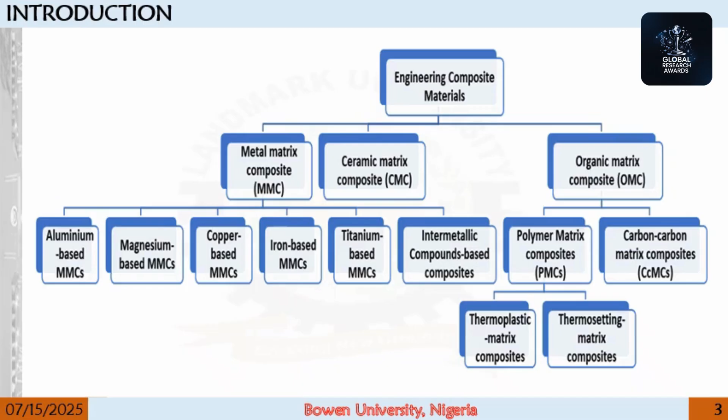However, we are concerned about the metal matrix composite, and it is the focus of this study. It consists of a metal matrix as the base material, into which the reinforcement material is introduced. Now, there has been an increased demand for MMC in automobile, marine, and aerospace industries due to their enhanced properties. And in these, aluminum alloys are the predominant non-ferrous metal used for these various applications due to their good strength to weight ratio, corrosion resistance, and heat and electricity conductivity.

Now, several methods have been used in fabricating AMMC or MMC and are available as presented. So these are the various ways. You have the solid state, the liquid state, and the other techniques. And under the liquid state, which is our interest, we're looking at stir casting. The stir casting method is our focus in this study. Stir casting process was used to develop reinforced matrix composite in this study.

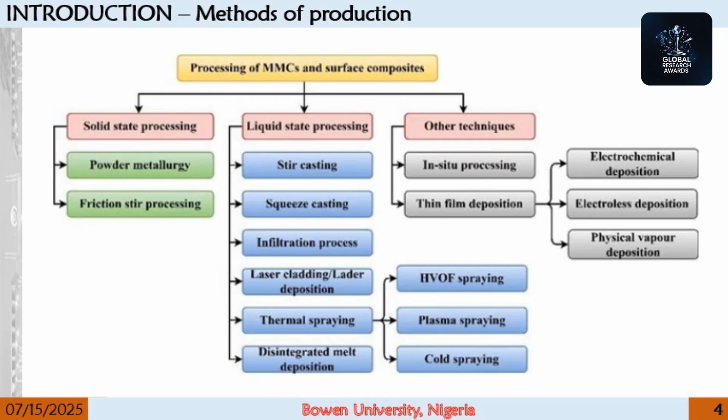Stir casting procedure is one of the most commonly used techniques in the fabrication of MMC, and most especially for aluminum matrix composite. The stir casting technique allows for uniform distribution and dispersion of the reinforcement particle with the matrix material, thereby granting the resulting composite good wettability and reactivity.

Several reinforcements have been used by different researchers. For instance, graphene, titanium carbide, alumina, silicon oxide, boron carbide, silicon carbide, and so on have been used, as displayed in this figure. Those are called the synthetic ceramic reinforcements.

Now, due to the high cost of these synthetic ceramic reinforcements, alternative reinforcement materials have been researched by several researchers, and hence attention has been turned to the utilization of agro waste or biomass and industrial waste and their derivatives, which are considered environmental waste. Some of these wastes include rice husk ash, bean pod ash, palm kernel shell ash, bamboo leaf ash, fly ash, which is an industrial waste, red mud, and so on.

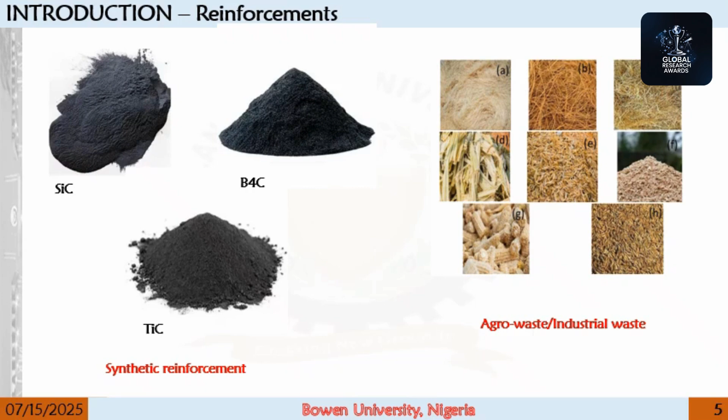These derivatives are hybridized with synthetic ceramic reinforcements to produce MMCs. So they can be hybridized, or they can be used monotypically for the production of MMC, which is metal matrix composite. As seen in the other figures there, we have the corn cob and other materials being shown there.

Now, several researchers have developed different aluminum hybrid matrix composites which are being used across the globe, though new research work is still ongoing to discover more suitable compositions of reinforcement materials. However, little or no work has been done on the effect of sawdust ash, especially the teak wood, as a monolithic reinforcing particulate in aluminum matrix alloy for AMC synthesis. And that's why this topic is looking at these aspects for our research work.

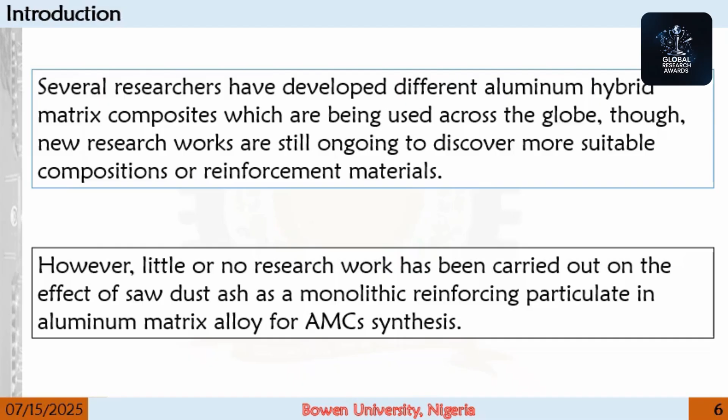Now, the aim of this study is to evaluate the effect of using Tectona grandis sawdust, which is the teak wood sawdust, as reinforcement on the physical and mechanical properties of aluminum 6063 matrix composite. And some of the specific objectives of this work are to evaluate the physical properties of the developed composite, to assess the mechanical properties of the developed composite, and analyze the strengthening mechanism of the composite through examination of the fracture surface of the composite produced.

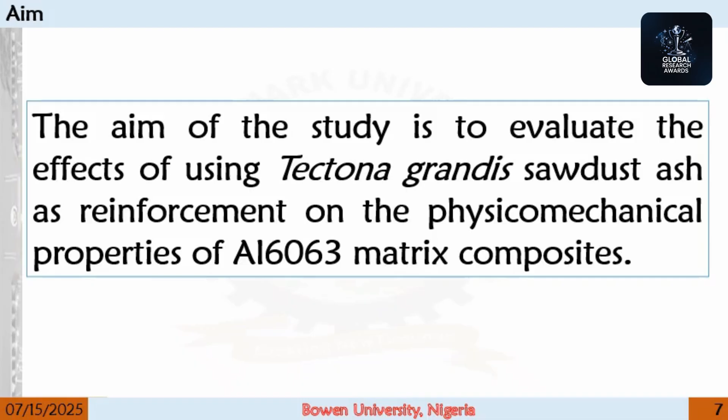Now, these are the materials used for this study. We have the sawdust ash from teak wood, the aluminum matrix, and their chemical compositions are displayed. For interest, in table 2, silica, which is SiO2, is the required one. It has the highest percentage, which is required. Other elements, oxides, are also strengtheners that help to improve the property of the matrix.

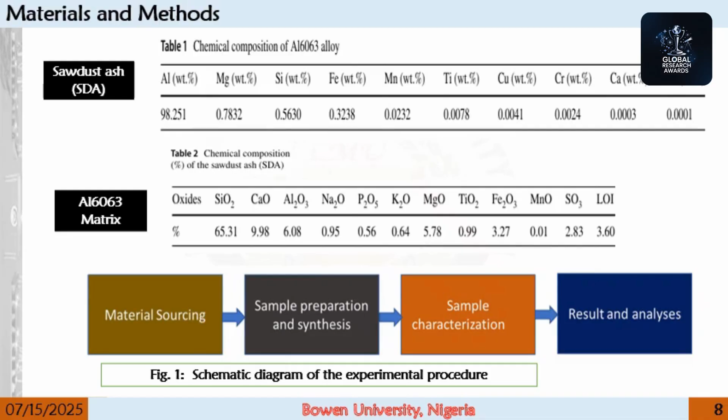So figure 1 shows the method by which these materials are produced, up to carrying out the results: from material sourcing to sample preparation to sample characterization and result analysis. Now, table 3 displays the design, how it was designed. A0 designation means that it's the control sample, where the alloy matrix is not reinforced, it's an unreinforced alloy, while the other ones are reinforced with 2%, 4% and 6% of the sawdust ash.

After production using the stir casting method, figure 2 ensued, where we have the solid metal composite from the sand casting, and it was later machined to produce the tensile sample as shown in figure 2b. The experimentation carried out on this was to determine the density and porosity percentage, and density was determined using Archimedes' principle, and porosity was also taken.

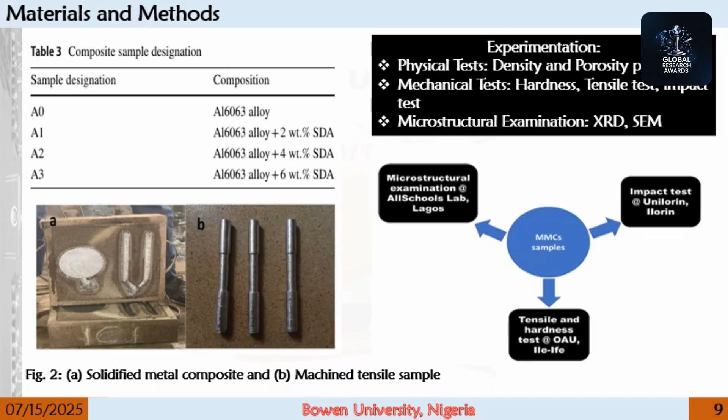So for the porosity percentage to be determined, the theoretical density was obtained and the experimental density was also obtained, and the difference between the two was used to calculate the percentage porosity. We also carried out the hardness test, tensile test and impact test following the appropriate ASTM standard. And lastly, the microstructural examination was carried out for the sample after production and for the fractured surface of the sample.

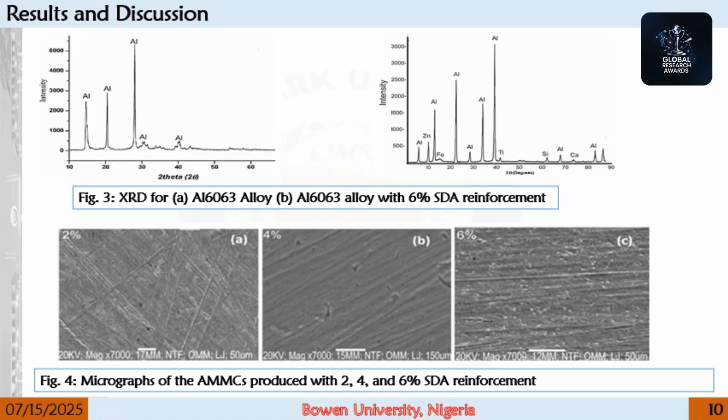The SEM micrograph seen in figure 4 displays uniform distribution of the SDA in the aluminum matrix showing low porosity, and this can be attributed to the stir casting route used in fabricating the composite, which allowed proper dispersion of the reinforcement.

Now, for the density and porosity, table 4 shows the theoretical density and the experimental density. The theoretical density was determined using the rule of mixtures, while the experimental density was determined using mass over volume, and these are the results obtained. And porosity was calculated by subtracting and taking it over the theoretical density to determine the porosity value.

And from these results, the following can be deduced: that the density reduced with SDA addition in the composite, and this is due to the lower density of the sawdust ash compared to the aluminum. So the more the SDA in the constituent, while the aluminum is being reduced, the lower the density also of this.

It shows that the reduction makes it possible for us to produce for lightweight applications using the stir casting method, and also the stir casting method is a reliable method for developing AMC. And the variation in the experimental and theoretical density was majorly caused by voids and pores, which indicate some level of porosity in the composite, as seen in the porosity percentage.

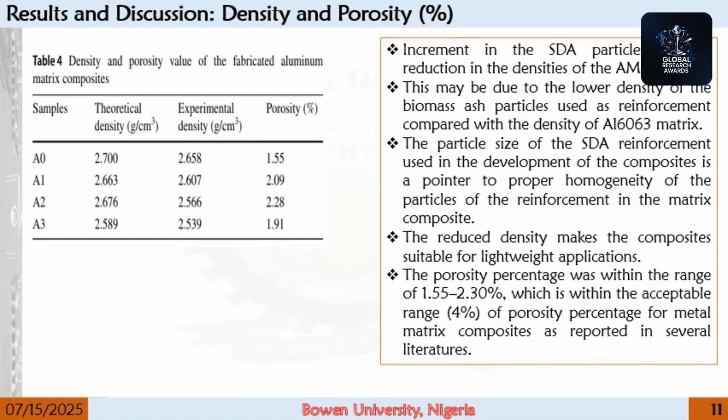Now, for the other mechanical tests, hardness, tensile strength, and impact strength, figures 5, 6, and 7 display them respectively. The hardness and tensile strength of the composite, as seen in figure 5 and figure 6, increase with addition of SDA. This may be due to the presence of hard phase and strengtheners of the SDA particles in the ductile matrix. An increase in hardness can also be attributed to the increasing reinforcement surface area and matrix grain size reduction as a result of addition of the reinforcement particle. And the increase in the tensile strength can be attributed to strong particle and matrix bonding interaction resulting from the uniform dispersion of the SDA particles in the metal matrix.

Now, the thermal mismatch phenomenon between the matrix and reinforcement in terms of their thermal expansion coefficients is another good reason for the improvement of the composite material developed. Another mechanism is the Orowan bypass mechanism, which is another improvement mechanism where there is a grain refinement of the matrix alloy as a result of the reduction in the grain size of the metal matrix to accommodate the reinforcement particle during the production and processing of the composite.

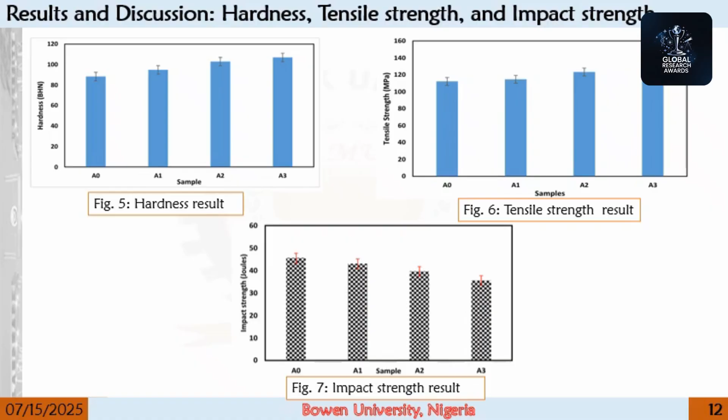The unreinforced alloy has the highest impact strength, and the impact strength reduces with increased SDA addition. The brittleness of the SDA particles, even though they are hard, used for the reinforcement, and the fusion of voids in the composite could be attributed to impact strength reduction. So that's why the impact strength reduces due to the brittleness of the SDA particles.

Now, this is the microstructure of the fractured surface after the tensile experiment, and from this we have first the unreinforced, the 2%, which is B, the 4%, and the 6% SDA reinforcement accordingly. The microstructural examination was done on the fracture surface of the tensile sample, as earlier said, and the crack propagation resulted in failure due to absence of reinforcement particles in the unreinforced matrix alloy.

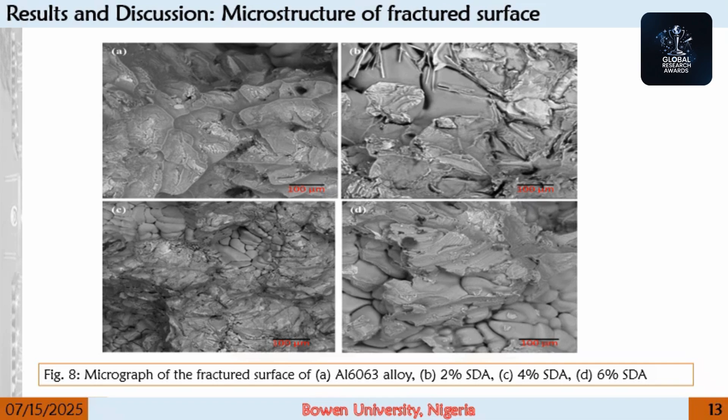And the reinforcement particles have the tendency of reducing the crack propagation due to the material flow restriction, according to Yadav and Bowen 2011. Also, SDA addition enhances the plastic deformation of the composite, while the elastic deformation is reduced with increased load of composite. Better compatibility as SDA content increased in the matrix alloy. This could be linked to the increased hardness and tensile strength values of the composite.

In conclusion, this present study used environmental biomass waste derivative sawdust ash as reinforcement particles in aluminum 6063 alloy for the development of mono-reinforced composite using the stir casting route. The structural, microstructure, and physical mechanical properties of the developed matrix were investigated to determine the influence of SDA particles addition on the properties of the metal matrix composite developed. From this, we could see that the SDA particles as reinforcement contain strengtheners in oxide forms, which strengthen the matrix when added. Homogeneous dispersion of reinforcements was achieved through the stir casting route, showing that the stir casting route is a reliable method of producing MMC.

Density reduced with increased SDA particles, while porosity is less than 4%, which is the acceptable limit. And also, from the study, hardness and tensile strength increased, while impact strength decreased with the addition of SDA particles. The SDA addition enhances the plastic deformation of the composite as revealed by the micrograph. And lastly, the SDA is suitable for developing MMC for lightweight engineering applications.